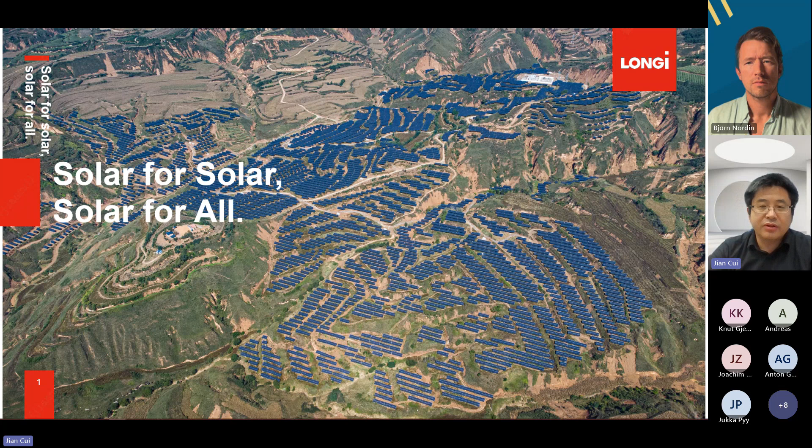So today, I will give a presentation about Longi, short updates of our Longi company, and the cell technology trend and our new product Hi-MO X6.

Longi was founded in 2000, and we started first with the business unit Longi Silicon, focusing on mono ingot and mono wafer. We are the first and only company starting from day one focused on mono technology. Since 2014, we moved into mono cell and mono module, that time was PERC technology. In 2021, we have a new business unit called Longi Hydrogen, taking care of green hydrogen products.

So we have two solutions for our customers: one is green electricity, one is green hydrogen. Here you can see our financial figures in year 2022 and the first half of 2023.

For the mono wafer, we have been continuously the world's #1 in shipments for 9 years. That means our competitors, the module manufacturers and cell manufacturers, they buy wafer from us also. And for mono module, we have been continuously world #1 in shipments for 3 years, from 2020 to 2022.

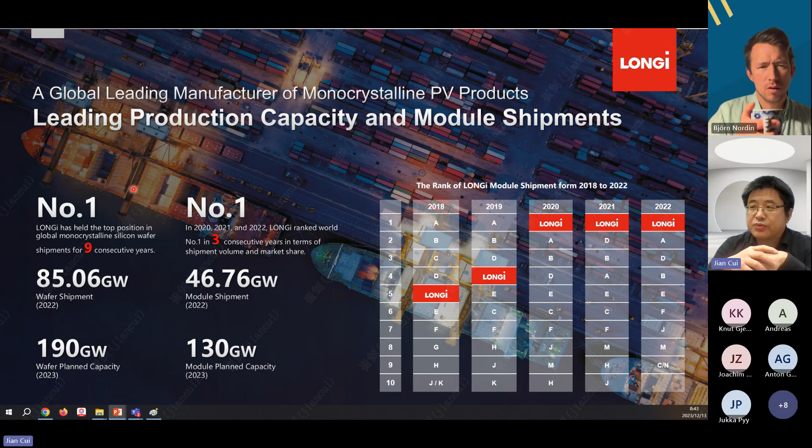Longi, we are big in capacity and shipments, #1, but that is not what we are emphasizing. We emphasize that the most important thing for us is to manage the risk, because that is the best warranty for our customers. We are always tier 1 PV module manufacturers, and for the Altman Z-score, this is from Bloomberg to measure the financial health of the company. Longi, for silicon-based PV module manufacturers, we're always #1.

Bankability indicates that if you buy the Longi module and show the bank, they say we have been AAA for 3 years already, the top position, then it's easy to get funding from the bank for your projects. So bankability is a very critical measurement. It considers the manufacturing side, including shipments, capacity, technology, and also the financial health such as the Altman Z-score.

Longi has been setting up the industry benchmark through all the years back to 2015, through our products like PERC, bifacial, half cut, M6 size, wafer size, M10 size, and now back contact. Due to our contribution, the global market share of mono technology, which was less than 20% back in 2015, is now more than 98% mono.

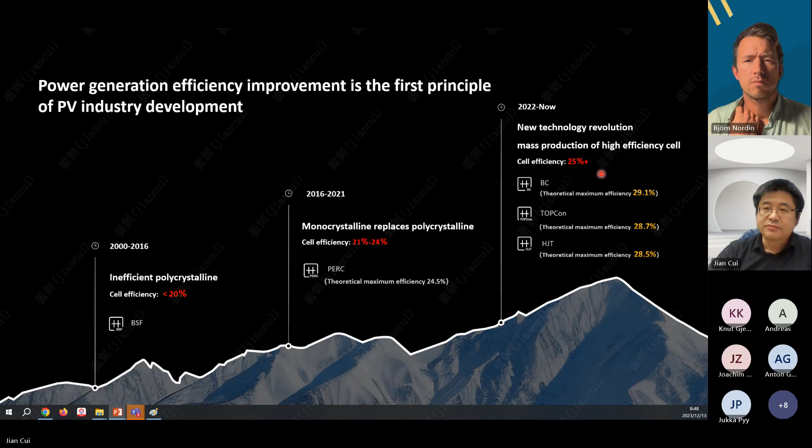For Longi, we already have mass production with cell efficiency on back contact of more than 25%. We hold all the world records on PERC cell efficiency, TOPCon cell efficiency, and heterojunction cell efficiency. Especially last year in November, we set a world record of 26.81%, breaking the record held by a Japanese company for nearly 7 years. The results were published in Nature, and our founder, Mr. Li Zhenguo, is one of the authors.

We received congratulations from the father of modern photovoltaics, Professor Martin Green. Here's his greeting.

Can you hear the voice? No, sorry, we can't hear the voice. Okay, let me share the screen again. Sorry. Okay.

Hello, I'm Martin Green from the University of New South Wales in Sydney, speaking to you from Sydney. I'd like to extend my heartiest congratulations to Longi on this magnificent occasion, setting a...

Sorry for that. Hello, speaking to you, I'd like to extend my heartiest congratulations to Longi on this magnificent occasion, setting a new world record for silicon solar cell efficiency of 26.8%. This is an outstanding achievement, and we're planning to include this new result in the next version of our efficiency tables published in Progress in Photovoltaics. So once again, congratulations to all those involved at Longi, and I look forward to the next record—27% just around the corner, and then 27.5, and maybe then 28%. Congratulations again, and all the best wishes to the team at Longi for the excellent results they've been attaining, and best wishes for the future.

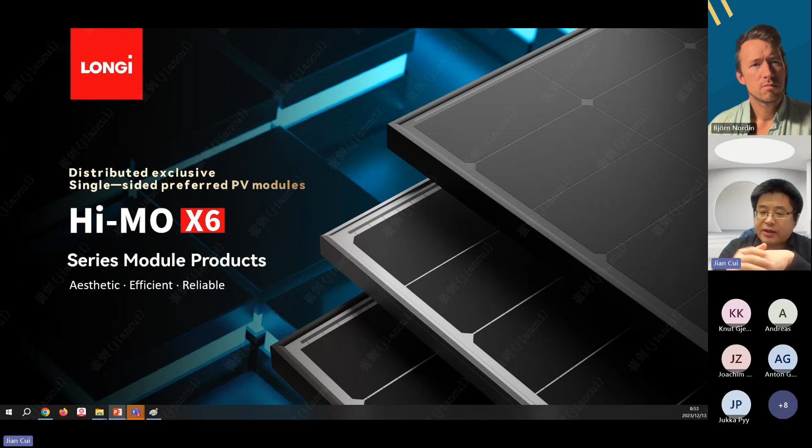Now we come to the Hi-MO X6, which uses back contact technology. Why did Longi choose back contact technology as our technology platform? If we say TOPCon is orange juice, heterojunction is banana juice, and PERC is apple juice, then back contact is kind of a mix—and how you mix it depends on how you play with it.

Since there's no metal contact on the front side of back contact cells, there is more light absorption compared with TOPCon—2% more—and compared with heterojunction—7% more. Besides, for more advanced cell technology, it helps a lot to reduce current loss on the cell. TOPCon can reduce current loss by 50% compared with PERC, but back contact can reduce it by more than 80%.

As I mentioned, it's kind of a mixed juice—back contact can combine heterojunction, TOPCon, and PERC into it to achieve higher efficiency. That's why in theory it has 29.1% cell efficiency, the highest. But TOPCon can only go so far, and heterojunction is the same.

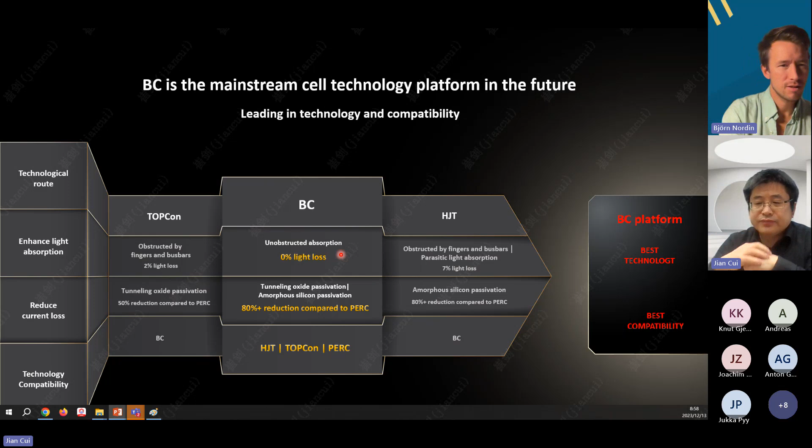Yes, perfect, thank you for a good explanation. Some work on TOPCon, some work on heterojunction, and some work on back contact. But as mentioned, back contact has the highest cell efficiency in theory, so it has more room to develop. Yes, and there are also some other advantages, I will explain in the next slides. Yes, thank you very much. You're welcome.

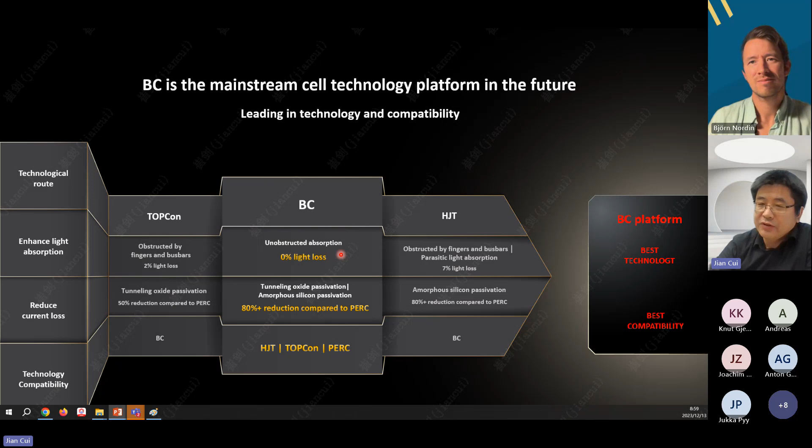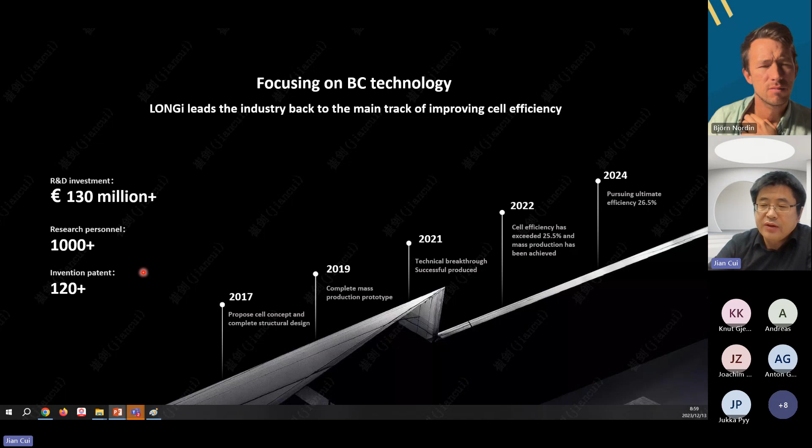So this is the development milestone from Longi on back contact. Since 2017 we already started, and we've invested more than 130 million euros on this. More than 25% of our R&D employees are working on this, and we already have more than 120 patents on this back contact. We call it, as mentioned, kind of mixed juice - how to mix this depends on you. So we call it HPBC, hybrid passivated back contact.

And we have two versions: one is normal HPBC, one is HPBC Plus. HPBC Plus has 0.3% more cell efficiency than the normal version. It has better light absorption, better photoelectric conversion, and better electrical transmission. This is related to there being no metal contact on the front side, and related to the passivation technology here. Also, this is due to all the metal contacts being on the back side of the cell, so the electrical transmission is much more stable than others.

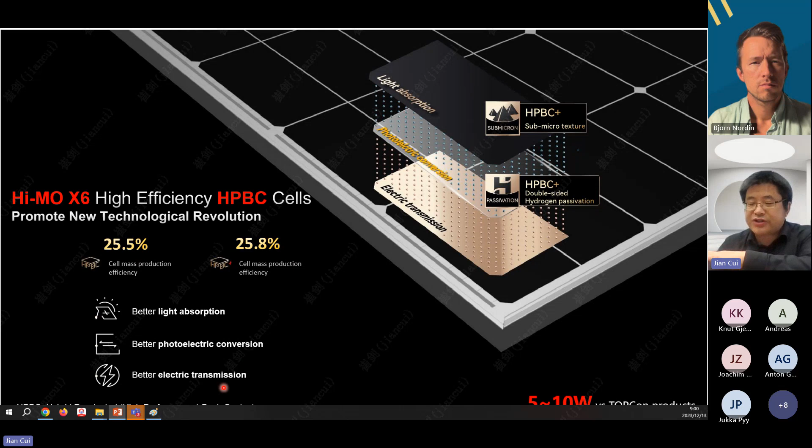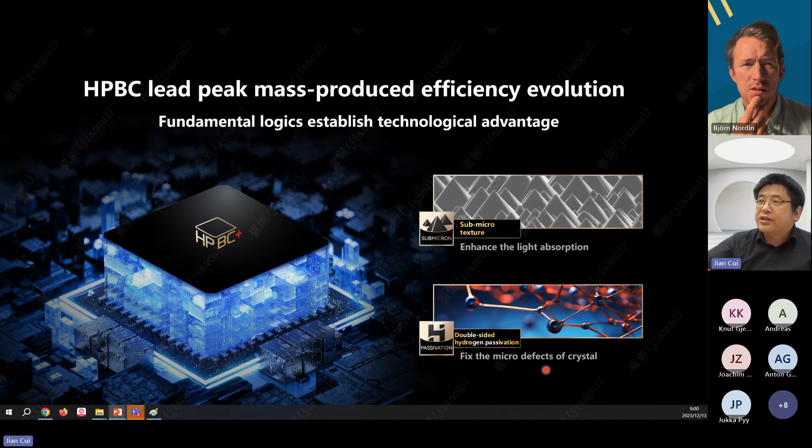So what's the difference between HPBC Plus and HPBC? HPBC Plus has two more things added on. One is on the surface of the wafer of the cell - they have more small pyramids to increase light absorption. Also, for both sides of the cell, they have one more called hydrogen passivation. This hydrogen passivation can fix the defects of the crystal during wafer processing or cell processing, with the end goal of increasing cell efficiency. So the HIMO X6 - why we call it HIMO is because it means high efficiency mono.

X6, X represents the back contact technology, 6 is generation. Explorer is a member of this HIMO X6 family. We also have Scientist, Artist, Guardian, etc. So these are the key characteristics of this HIMO X6 module.

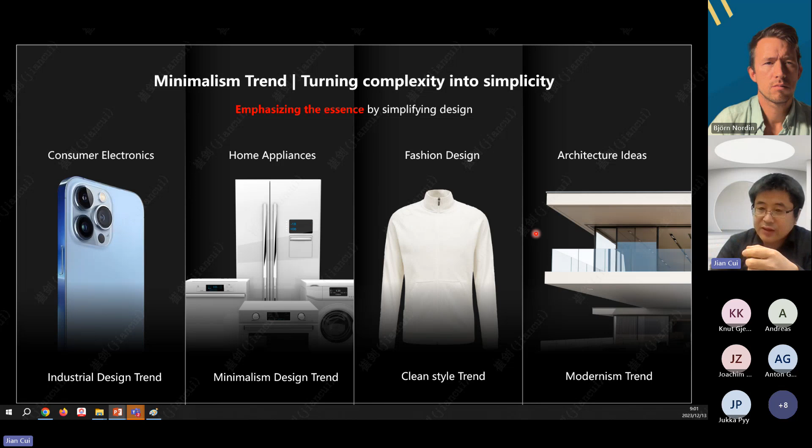It has the following aspects. One is that this technology defines the aesthetics. Nowadays in the industry, there's a trend of moving from complexity to simplicity, where people want to find the essence, the nature of the product. For the module, we don't want too many metal contacts on the front side. It looks not good, and it will also not help with light absorption. We want the front side clear, so more light can be absorbed, and it looks better and more harmonious to the environment and your design.

So for the HIMO X6, we currently have Obsidian Black and also Stars. For the Stars, by arranging the cell array on the module, they leave a kind of shape among the cells that looks like stars. So if you compare with others, whether TopCon or PERC, they don't look as good.

This gives you a rough idea of what it means to have no bus bar on the front side. It will help you increase your installation capacity for the same roof area. And especially our module is smaller - the width is the same, 1134, but the length is 1722.

But other people's, like TopCon, is mostly 1762. So our module is more efficient. Module efficiency is higher also.

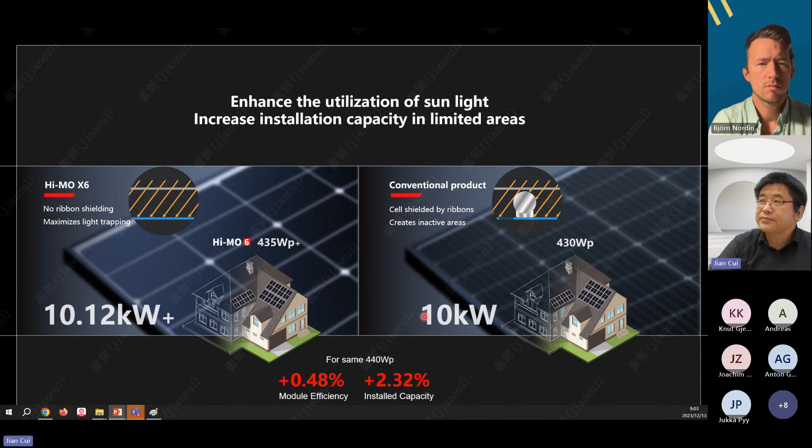Now I'll explain the reason why the back contact technology HIMO X6 has better power performance than PERC and TopCon. The first is temperature. These modules are not afraid of high temperature. The measurement of this performance at high temperature is called temperature coefficient.

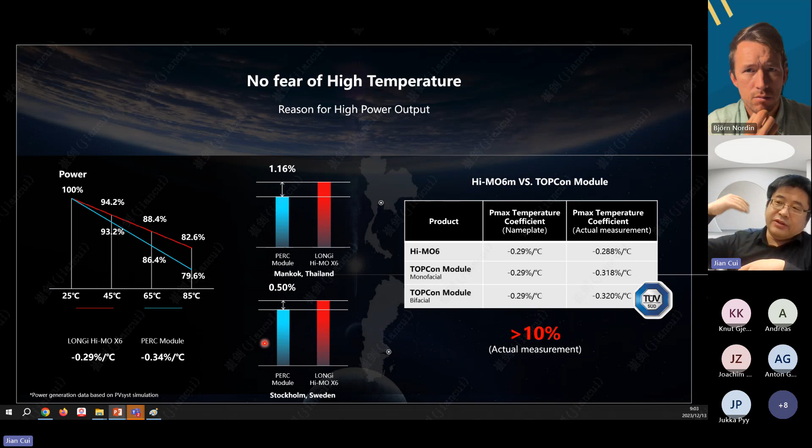It's similar to if people get a fever, you cannot think clearly - it's the same for the module. If the environment temperature is high, then the module cannot work very well. So the temperature coefficient is a kind of measurement of this, and the lower the value, the better.

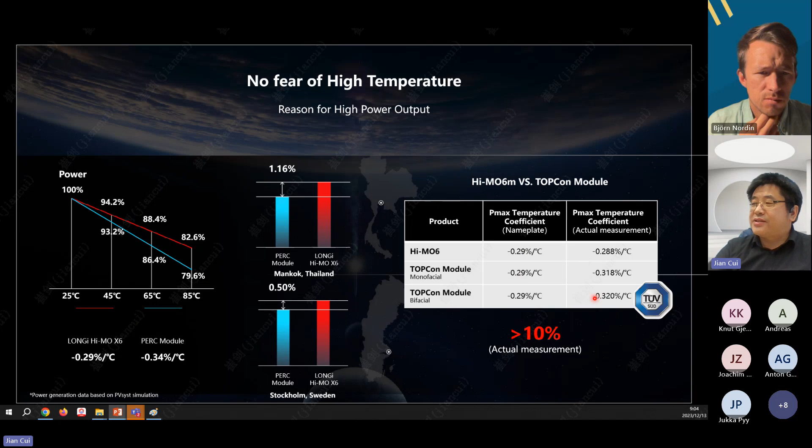And also under weak light situations, like cloudy days, early in the morning or late in the afternoon, it's 2% better on power performance than PERC, and also nearly 2% compared with TopCon modules.

About the cell technology itself - if we want to increase cell efficiency, not the size of the cell, it will bring you higher open circuit voltage. The voltage will always be higher. So that's why HIMO X6 has higher open circuit voltage than TopCon and PERC.

This will help the string, the module, trigger the inverter earlier. So the HIMO X6 module is a very diligent module - it gets up very early and sleeps very late. So it offers you a lot more power compared with others.

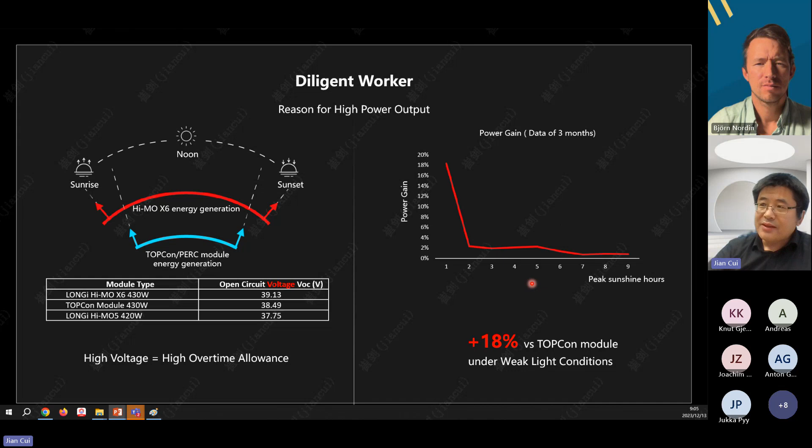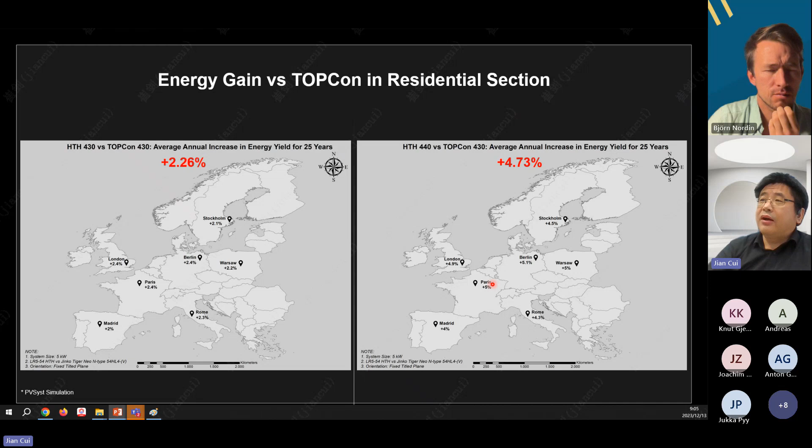Compared with TopCon, as you can see, it's more than 18% better. So we have simulations on residential installations all over the main areas of Europe, and also for C&I. This shows that both cases are better along the 25 years, and better than TopCon.

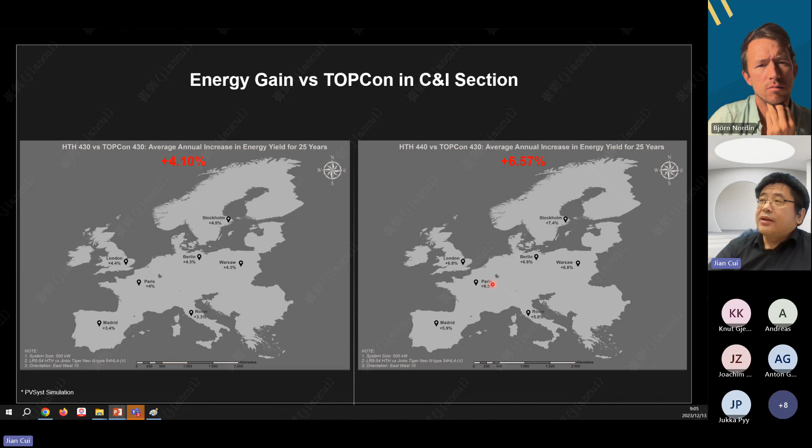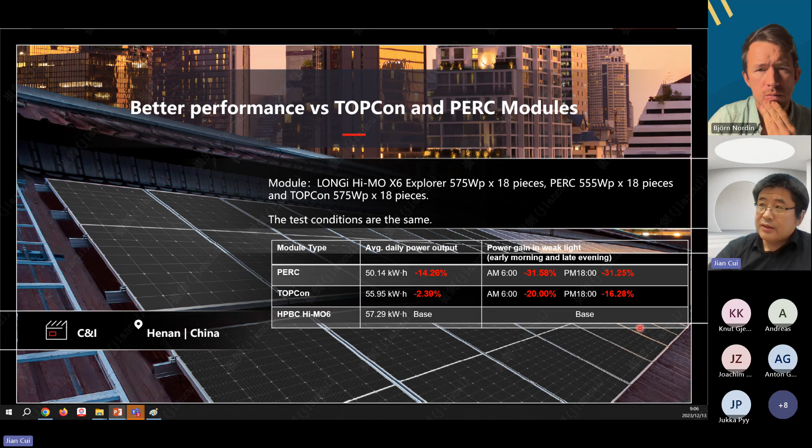Reliability - why do we want to emphasize reliability, especially under the situation nowadays of dramatically decreasing prices due to this unhealthy competition for module price? 27% of the claims for PV plants are due to module quality itself, and also disasters, sometimes related to module design. Here's an example happening in the Netherlands.

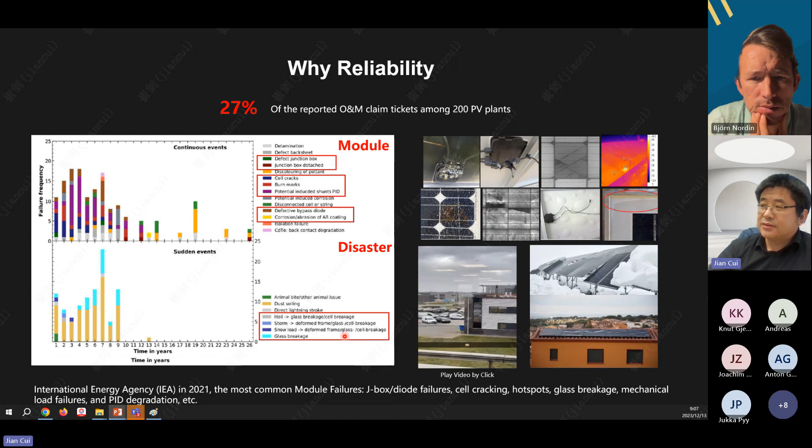So you see the module blown out in a storm. For the financial consideration, the capital invested in your plant and the operation and maintenance cost over 25 years for the project - let's assume 25 years - is the cost you spend on it.

All the revenue is the power you got within these 25 years. So you take those costs, divide by the energy you got, and that's called levelized cost of energy (LCOE). The lower the better, because for every kilowatt hour of energy you get, you pay less money. If you lose module reliability - say you install it and after 2 or 3 years the module has a problem - then you increase the cost. You need to change it, everything needs to be redone, and you lose energy generation, so you end up with a higher LCOE.

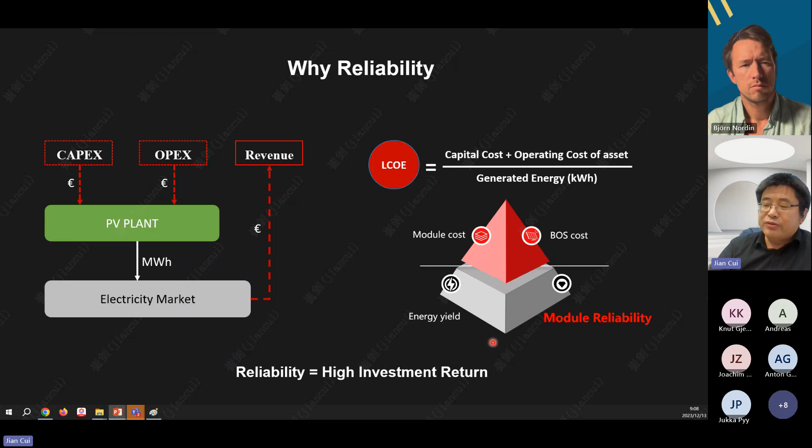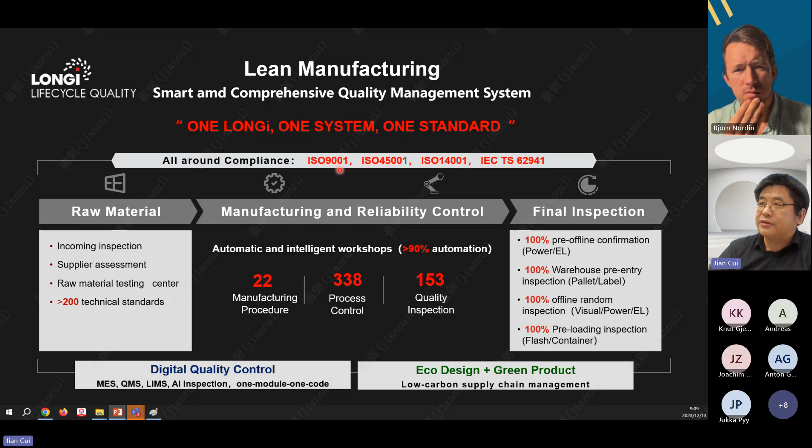So reliability, in fact, is your investment return guarantee. As you can see, Longi, through our technology innovation, helps the industry decrease the LCOE - by 2021 it was 0.048. To guarantee our quality and the reliability of our modules, we have the Longi life cycle quality control, from raw materials, through manufacturing, to final inspections. We have full control and management on it, and we fulfill third-party inspections and certifications, which are also written in our data sheet.

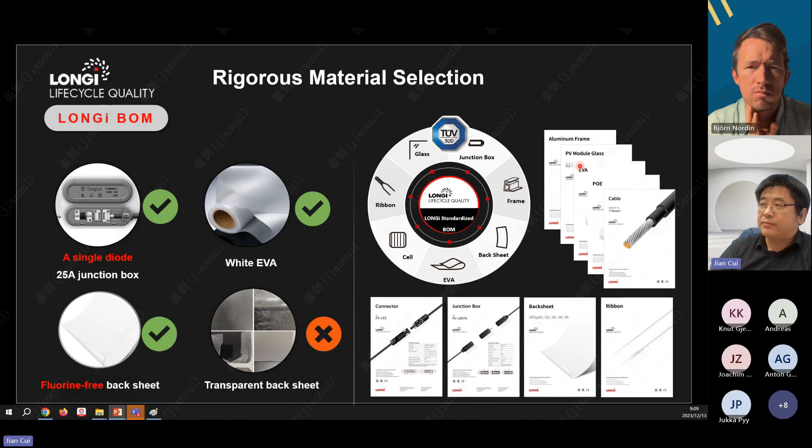Taking the example of raw materials, we are very critical about our suppliers. We critically select materials and also get certified by TÜV for the BOM. As you can see, all this data sheet is related to the BOM we're using. We also have very strict testing after the module is produced, and it's recognized by all the famous third parties.

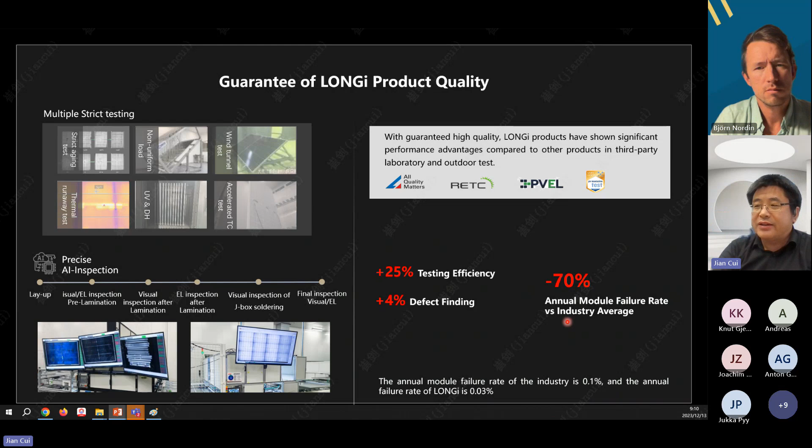Also, for more than 3 years already, we've involved AI technology in our inspections, so we've decreased our failure rate to 0.03%, which is 70% better than the industry average. That means the module you receive is guaranteed to be of high quality. This is just to show related to the module design.

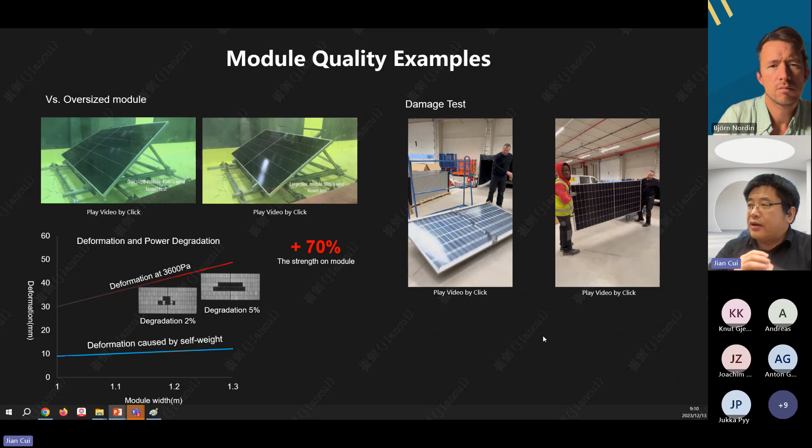And also we have tests 1, 2, 3 in the warehouse on the modules - you see there's no micro crack. A micro crack is basically like someone accidentally falling down and going to check the doctor - they feel pain in the leg, so they check an X-ray on the bones to see if there's a crack.

Similarly, when we do the EL inspection, it's like an X-ray on the module to check if there are cracks on the cell. If there are cracks on the cell, or even worse, the whole cell is broken, then on the EL inspection you'll see all black because the cell is damaged - this is very serious damage. It can also detect a small micro crack.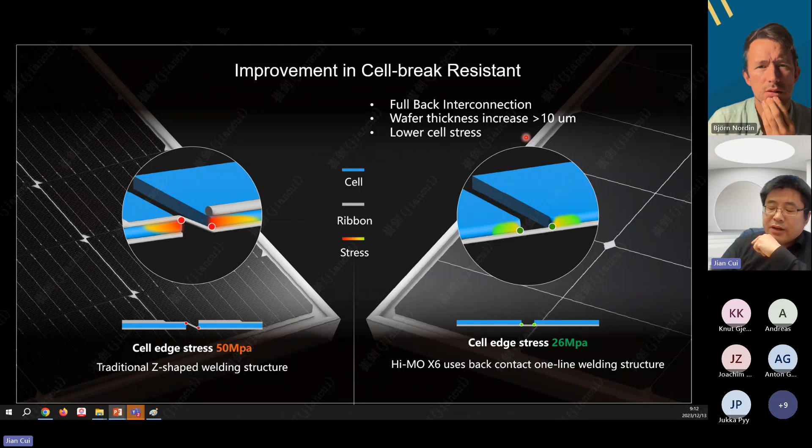So why P-type and N-type in the market? When we talk about P-type and N-type, both are at the wafer level. If you dope the silicon, you add other elements to it - that's called doping, because we need it to have positive charges and negative charges. The positive charges are holes, so a wafer with positive charge is called P-type. If you use a P-type wafer, then in the cell processing you need to add a negative charge on the wafer to form the PN junction, as mentioned before.

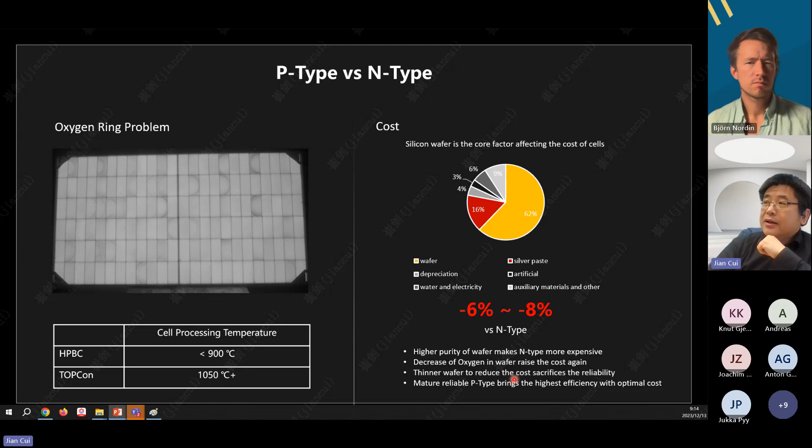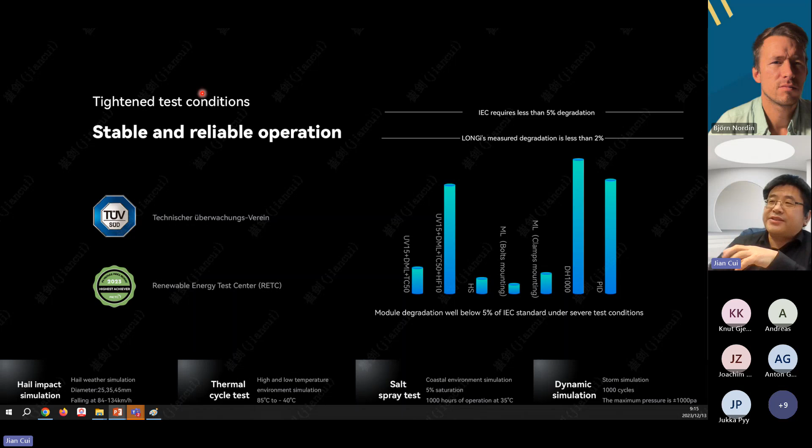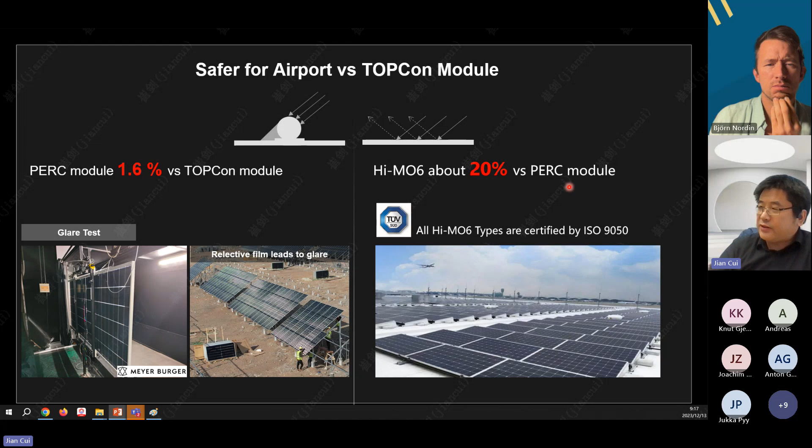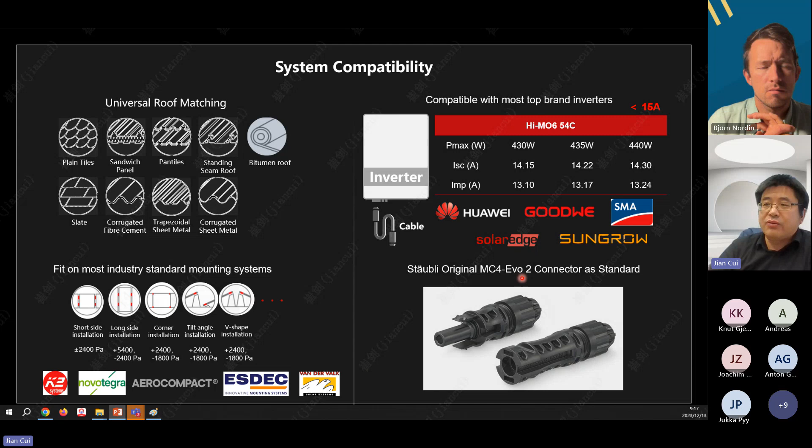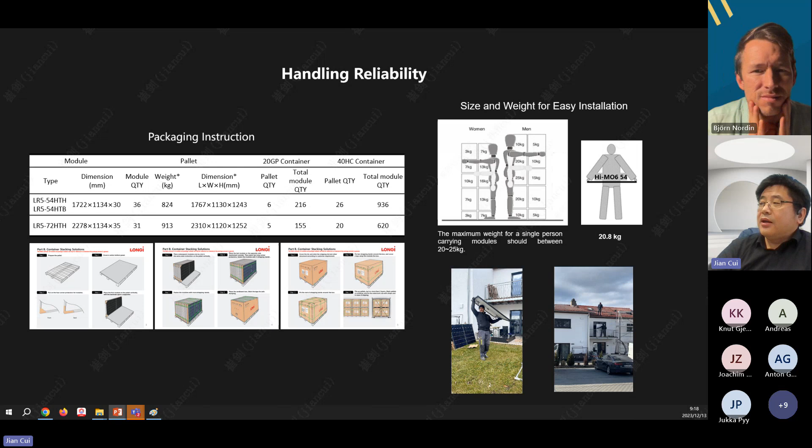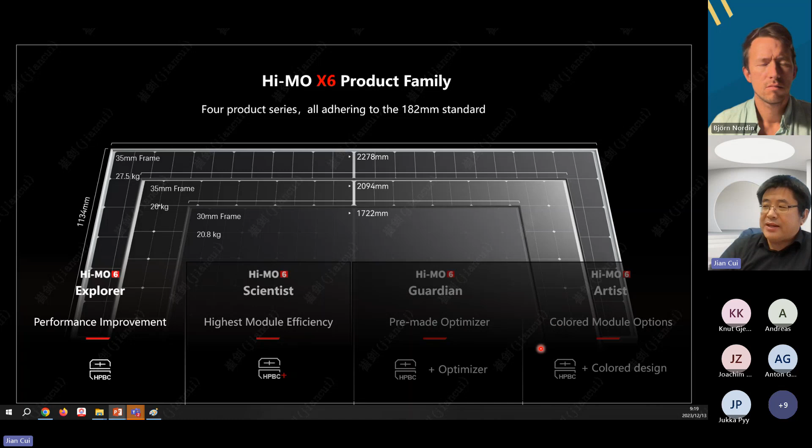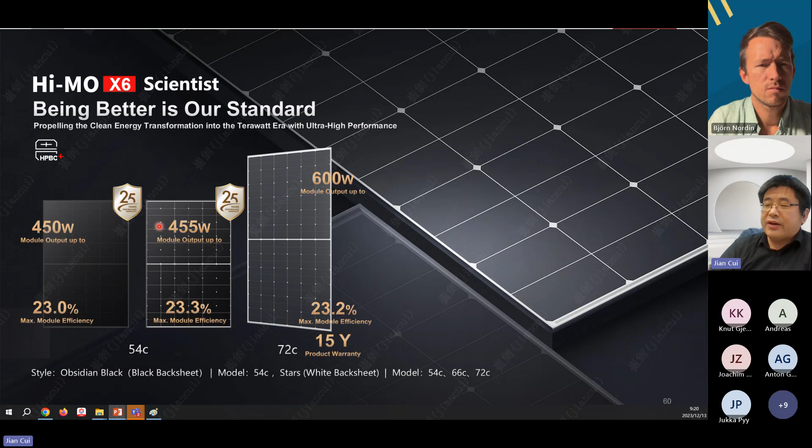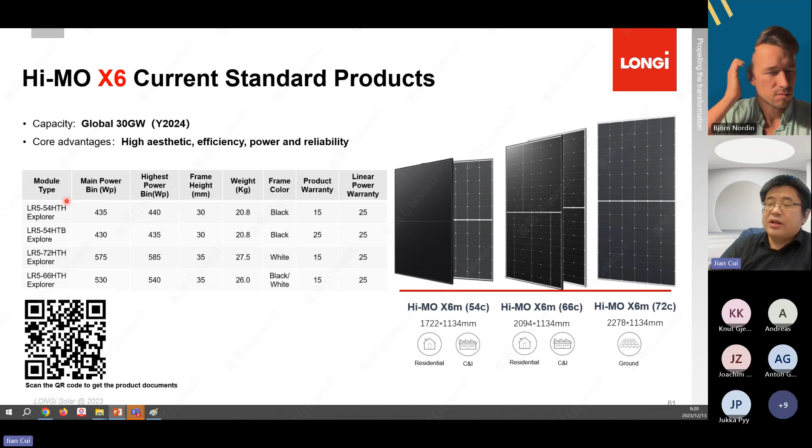And this is for the Scientist - it has 5 watts more power output, and also both have 25 years product warranty. This is a summary of the Explorer version, and if you scan this QR code, you get all the documents related to this module's information.

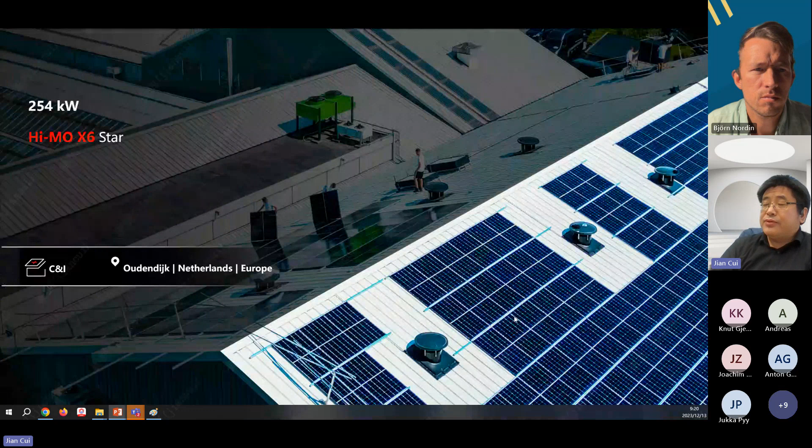Sustainability. Last but not least, for environmental, social and governance, this ESG issue, Longi is very focused on reliability. We were already listed last year, 2022, on Bloomberg, Fortune, and Forbes on the ESG topic.

Since 2018, in November, we announced the Solar for Solar concept at the United Nations Climate Conference. Following that announcement, we joined RE100, EV100, EP100, and Science-Based Target initiatives. We are the only Chinese PV manufacturer that joined all these initiatives.

This initiative is to measure your greenhouse gas emissions, quantify them, to see if you can fulfill the 1.5 degree temperature goal agreed in the Paris conference.

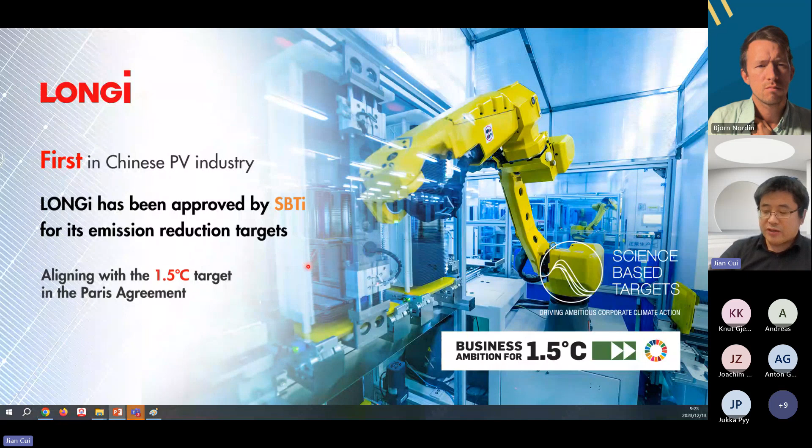We'll continue to work on that, because sustainability is the most important issue for Longi's future, and for our children. So that's all for today's presentation.